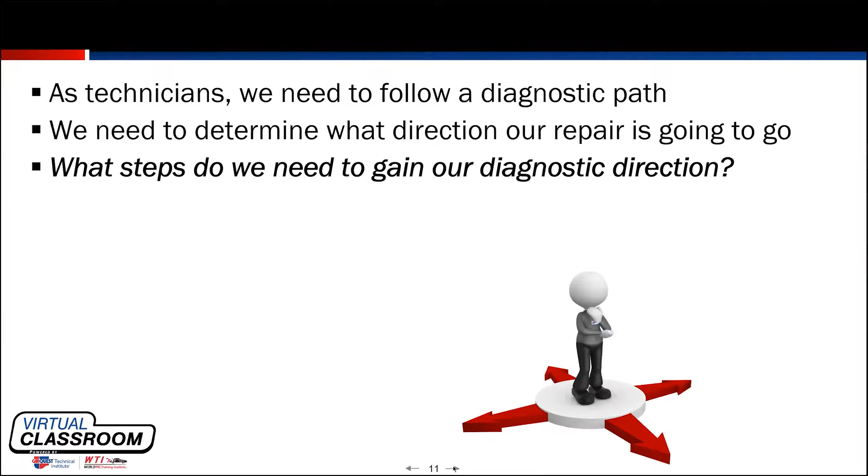So with that being said, when we talk about logic, we're talking about being methodical. We're talking about having a plan. And what goes into the plan is our understanding and our knowledge. How well do we understand what's happening? From that, we want to do one thing. We don't want to do 3 or 4 things. We definitely don't want to do 6 things. We do one thing. We understand what that means to us.

We look at it. So just because we did a test and it says move to step 3, why am I moving to step 3? Why is what I just tested good? And that's the way we want to approach everything we're doing, especially with electrical work, because it's so logical and rule driven. And then we're going to act on what we found.

For those who have heard this talk before, that plan, do, study, and act is a repetitive cycle to keep us from getting lost. I was having a conversation with a friend of mine, and he was saying we should probably do a course just on this with maybe 10 or 12 examples of how we apply it. But we're going to try and implement this throughout the class tonight as we move through some of the conversation.

So one of the things that came up in the previous electrical classes was talking about duty cycle or pulse width, and what impact does that have on an electrical system. I started looking at that, and I'm like, you know, there's a ton of ways to come at that.

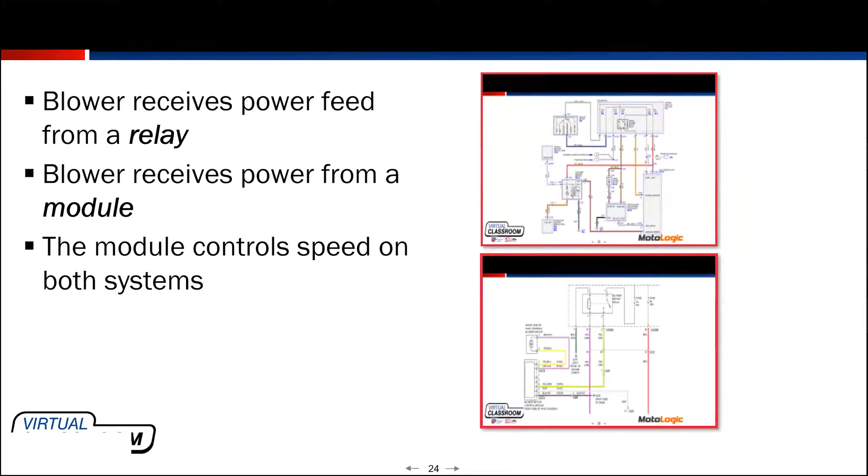It's warm weather in most of the areas that people are tuned in. So I'm going to give you an example of a blower motor control system. If you guys have been on a previous class, we did this one on Monday night. So just bear with us, but I'm going to go through it quickly because I want to put some time into some other systems.

So when we turn on that solenoid, when we turn the power on, the current flows. This is current here. We get the current to ramp up, and then we turn it off, ramp up and turn it off, ramp up and turn it off. And that solenoid is pulsed open and closed. So in this case, this is a pretty slow type of signal.

And what we're really controlling here is both the mechanical valve opening of that purge solenoid, but what we're controlling is the amount of purge vapor flow. Everybody good with that? We're controlling the purge vapor flow.

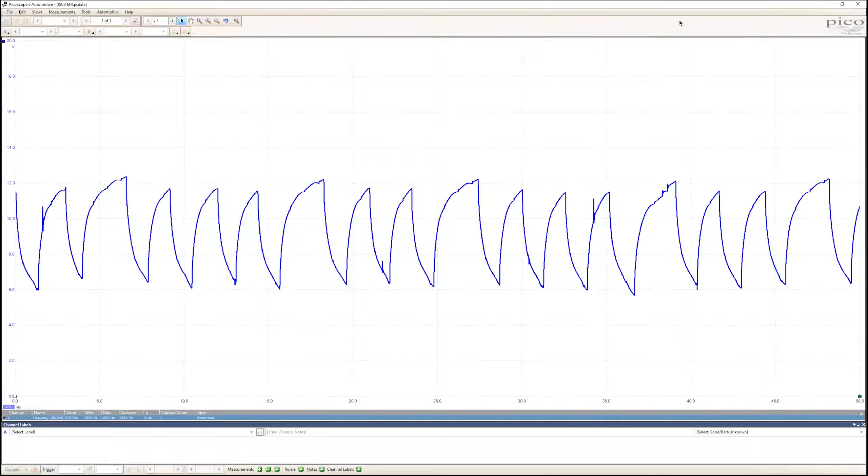And so if we turn on for a 20% duty cycle, then the amount of on time is relatively short. We will get that valve to open, but only briefly, so only a small amount of vapors will flow. If we increase that duty cycle, the purge valve will spend more time open than it was before, and we will get more purge flow.

That same concept can be applied to controlling an electrical device. So if we turn a light bulb on and off really fast, we can control the effective amount of voltage that goes to it.

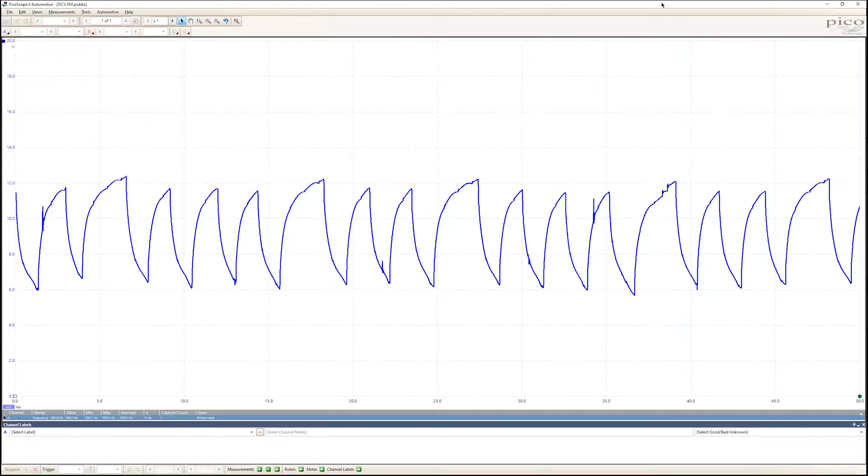Brian, are you there? I thought I heard noise. I'm here, can you hear me? Yep, yeah, absolutely, audio's good. All right, so did you have any headache with the way I just described that? I was not listening, I had to go get my headset. It was on my PlayStation. Okay, let me. It was on your PlayStation. Great, that's a good place for it to be.

How about if we have this conversation? What we're doing here, we're just getting our terminology right.

Now, if I put enough of these on the screen and I have a fixed RPM, I'm holding the engine steady at 800 RPM, and I put enough time on the screen, could I move this and incorporate multiple injector functions that are all at the same pulse width and get a duty cycle reading off of my scope?

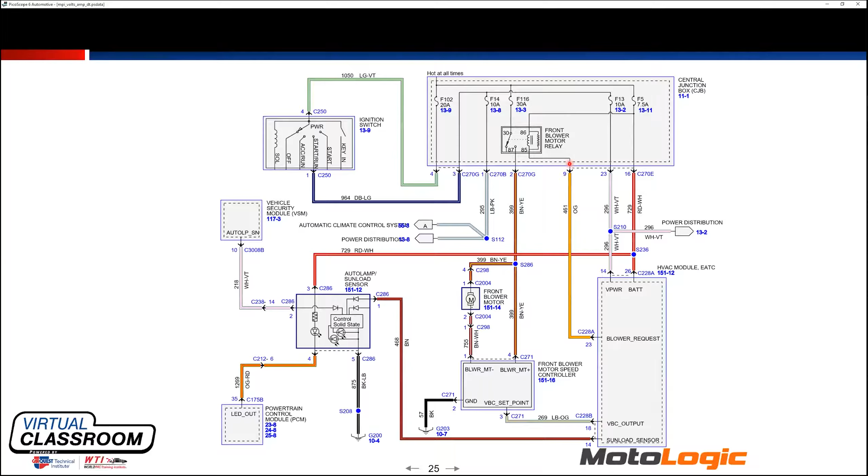And I don't have a problem with it. This is where I think good techs looking at, remember, this is a class on understanding how electricity works. And so when we're trying to understand how a device is controlled, trying to separate them out too far can get people lost. And we're going to get to the reason why as this class goes. So I'm going to say, okay, we've got some slightly different perspectives, but we have a base agreement.

So did you have any problems with what I'm talking about, with how this blower motor is controlled with the on and the off time at the frequency that this device produces, controlling the amount of voltage that's available to the fan, Brian? No, not at all. The duty cycle will change depending on the input coming in. So now we have to figure out, okay, where is the magic in that? And how does the device actually work?

And so here is another diagram. Does this look pretty similar to the last one we gave you? Mm-hmm. Yep. This is actually off of a 2010 Flex, this particular diagram. So we have blower motor relay control. And again, here's those dashed boxes in incomplete views, but these are complete views. So this blower motor speed control, this is a complete view. And I've got a picture of this one coming up. So we have the ability to control the relay.

We have power flowing to the blower motor and the speed control. And then we have, here it's called front blower PWM. And then here you can see in this one, Brian, we've got ground for the HVAC module at the same point as the ground for the blower motor speed control. Everybody good here? Yep.

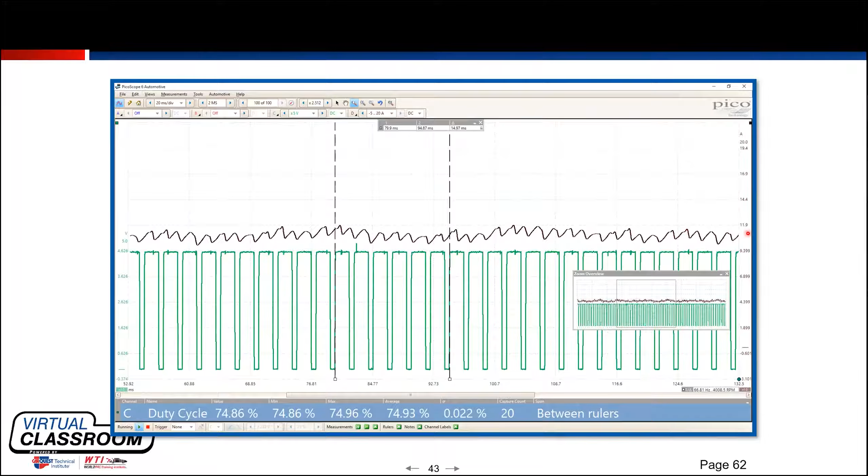So what we're providing as a signal to the speed control is a 5-volt signal here. And that 5-volt signal is being interpreted as how much ground is provided, or how much resistance is put in the ground by the pulse width in the blower control motor. Is that a fair way to put that? Yep. Okay. So then we're going to go one more here.

How would you describe that duty cycle? That is 100%. There ain't none, as we say where I grew up. Yeah. There ain't none. So there we have pretty much a full 5-volt signal to the speed control, and we're seeing a definite repetitive set of commutator events with the current flow.

What is the voltmeter on? What did I have the voltmeter on? This picture was from... Originally, the voltmeter was reading the duty cycle in the previous screens, wasn't it? Or was it just reading average voltage? I might be wrong on that one.

Oh, it's just on voltage. Yeah. Oh, you know what? That was reading average voltage at the ground side of the motor itself. I'd have to go back through my notes. There was a reason I was leaving the voltmeter out of the conversation. I can't remember. No, as a matter of fact, the voltmeter has an amp clamp hooked to it.

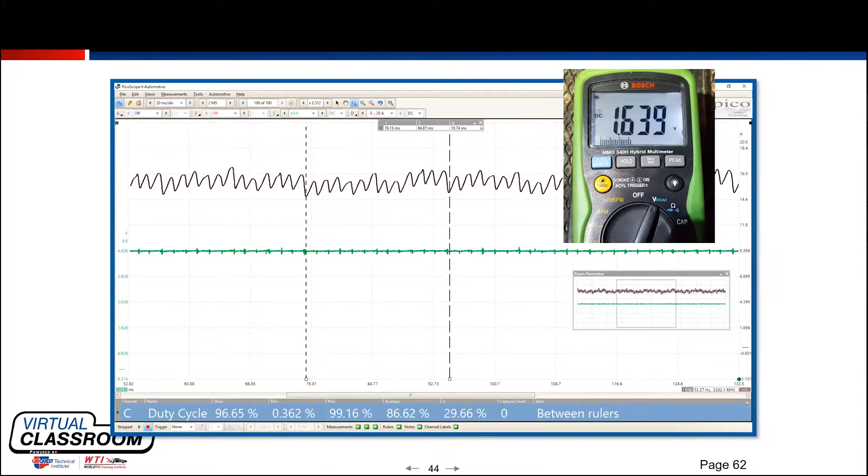So then here's the question that I have for everybody. We're going to go back to this wiring diagram. So what we were looking at with the scope was actually this front blower pulse width modulated input to the blower speed control. If we go to description and operation, it will say that the HVAC module provides a signal to the blower speed control.

So my question is, if this blower motor didn't run at all, could it be a problem with this wire? Sure. That's a missing message. So yes. Why do you say that? If the message isn't there, the controller doesn't know what to do.

Okay, actually, I'm going to show you something. Here's the blower motor speed control. I have supplied it power and ground. There is no HVAC module in play here. If you look at my voltmeter, it's connected to pin number 3. And with this speed control powered up, it's providing 4.73 volts.

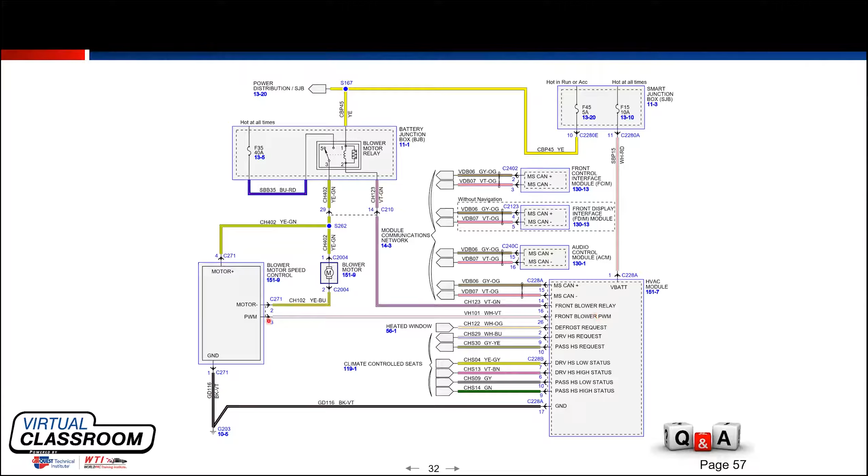And when we looked at the code set, the front blower control circuit, the conditions would be a short to B plus, or a short to ground or open. And that condition 14, if you had that code and the fan was running at all times, the first thing I would check would be that wire between the blower control module and the HVAC module. Does that make sense?

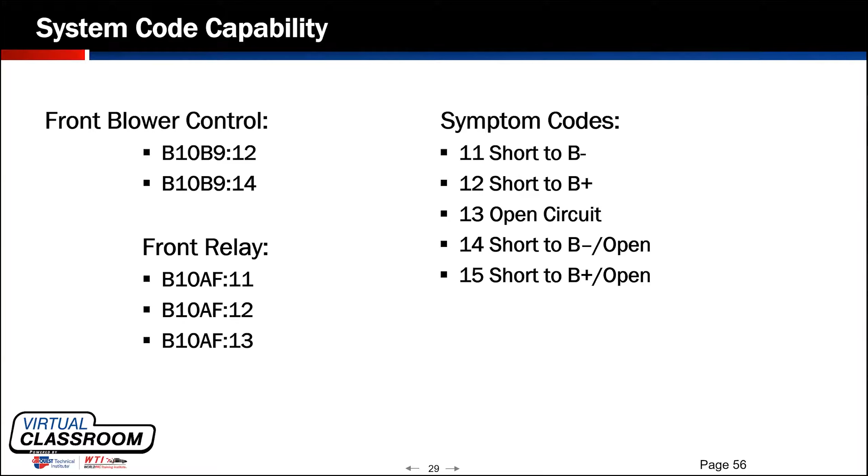Guys in chat, what, Paul? Not based on what you showed us. All right, explain that. I think what Paul caught was that if you go to the full speed signal, not providing a ground would cause the motor to run at full speed. Paul, is that where you were going? Yeah, without the HVAC module pulling it to ground, it's going to assume it's going to run full speed. Yes. Correct. Oh, I must have missed when that conversation actually took place.

All right. So let's look at something that is similar but different, another circuit that looks almost identical, and talk about how it works real quick. Here is a Toyota blower motor. This is most of their new ones. What you're seeing here is the blower motor and the speed controller integrated. If you look at this, that says blower motor, and this is a full solid line, so that's a complete view.

You have a blower motor with 3 wires: hot at all times, ground, and a speed input or signal on the light green wire. And this obviously can't work the same way because there is no relay to cut this thing off. That blower motor always has power and ground.

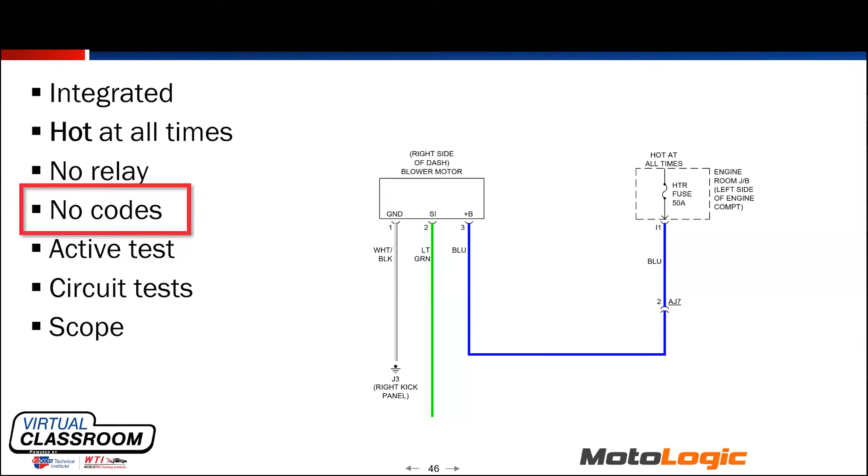Toyota provides no codes for this system. GM blower motors are almost identical, and they provide codes. I'll let you decide which one makes more sense. So, if we have power and we have ground and we do not have a signal here, this motor's not going to run. So here's an example.

Here's a PicoScope file. As a matter of fact, I have these. Let's see. I have a whole bunch of... where'd you go? There it is. Here's the actual PicoScope file.

It's impressive. Huh? It's impressive. Why is it impressive? There's a lot going on. There's a lot going on.

But if you look at this, channel A is fused power. And so you can see that's 12.5 volts there roughly. Channel B is ground. And so we're showing a good ground. Channel C is the speed control. And if you look at that, it looks like amperage. No, it's just voltage. Oh, I'm sorry, I'm on D. Go ahead. Yeah. And D is current. So the brown trace is current. You can see that's pretty much 0.

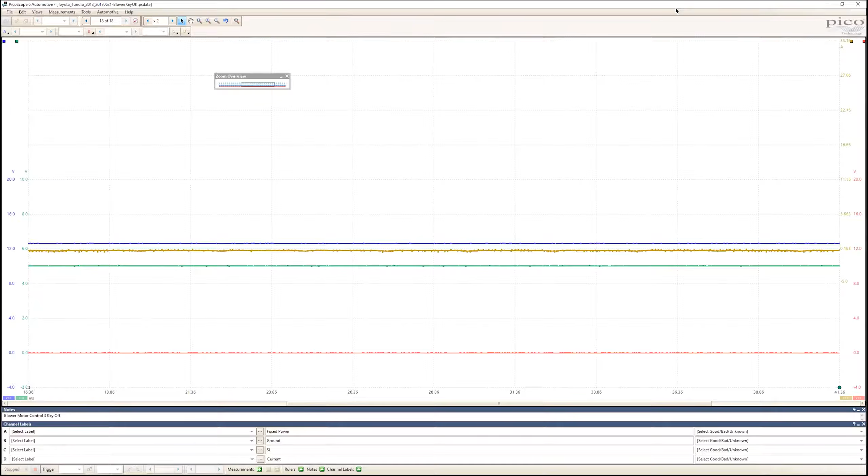So this is actually key off, engine off, right? And I'm hooked up to this setup, and this is proving exactly what we just showed in the wiring diagram. We've got hot at all times. We have voltage being supplied to what Toyota would call the HVAC amplifier, right? The AC amplifier. We have a solid ground, but we have no current flow. And so this one works completely differently.

So if we take a look at what happens with this, this is a picture of the PicoScope file, and I have this one here as well. But if you look at this, here we are, key on, engine on with the blower commanded off. And so the HVAC system is powered up, and there is a frequency of control and a duty cycle that could be measured if I zoomed in on this, but there is no current flow. And what I have done is gone from 0 speed up to speed 31 according to the scan tool, and then back down.

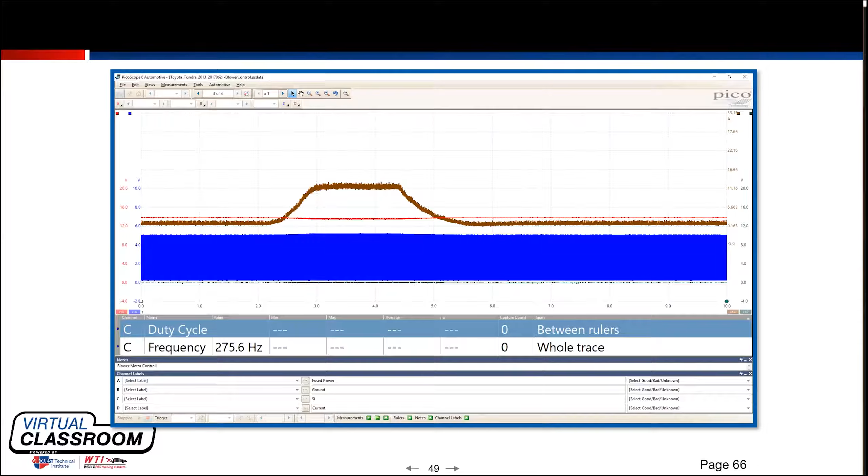And then as we ramp up to full speed, if you look at the window on the PicoScope here, now I'm at full speed. The fan is drawing 11 amps. And this is a brushless motor, by the way, so the current flow is pretty low on this thing. But the duty cycle is only making it to 40%. So with the fan commanded off, it's at 80-some%. With the fan commanded to full speed, it's at 40%. Anything other than that is not a valid signal, so it won't run. Okay, so it's commanded off, it's commanded up to full speed, but it never gets to a 100 or a 0% duty cycle when the HVAC module's on.

Is that a good piece of information to keep in mind? And I say, yes, it is. That rules out the ability to have a short circuit to ground or an open circuit, you know, because that's not a plausible type of scenario that would affect the blower motor. Correct. Absolutely correct. It wouldn't be stuck on high with it, you know, open.

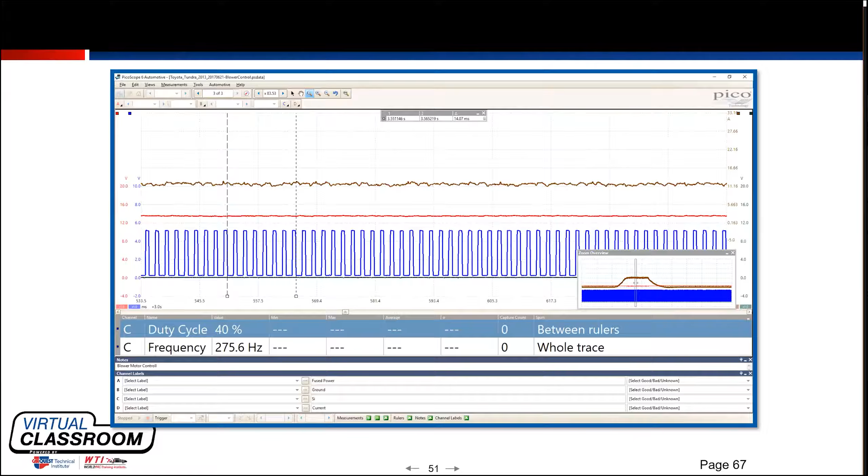All right. I was going to say you have to be careful because Toyota and GM label that green center wire as speed input. So guys want to unplug the blower motor and scope the speed input signal, but when you unplug the blower motor, you just lost your 5 volts and you're not going to see a signal. Correct.

Got to back probe that one. All right. So then we start having to think about more of what's going on. And so this is a huge topic, and we have to realize, what was my quote of the year from Monday night? Electricity and control of systems is a dynamic environment. Randy Briggs, 2020. He's probably been saying it for a lot of years, but there it is.

And so we can get into the laws and the rules, and we can talk about Kirchhoff, and we can talk about Lenz, and then we can talk about Faraday, and we can talk about all kinds of specific laws and rules. But for our purposes, what we need to understand is that it is a definite dynamic environment. And so these are some slides that Randy actually put together, and they have some real valid application, but they're kind of blending the topics all together, and there's nothing wrong with that.

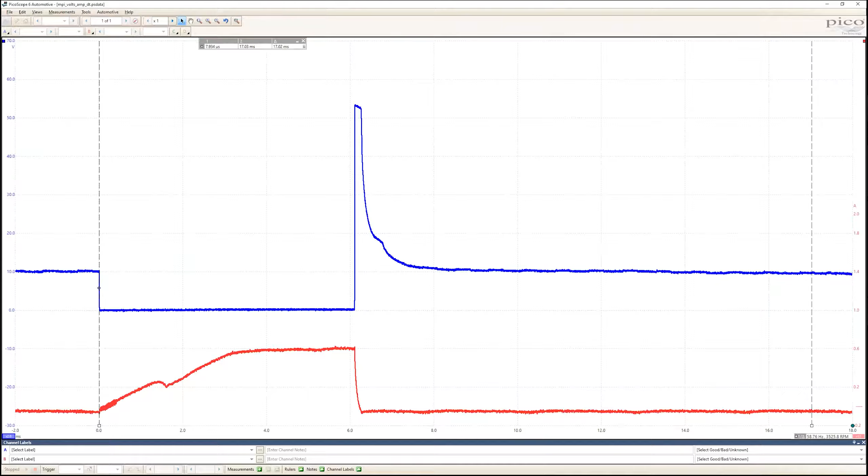And so what does that mean? It means that anything that affects this circuit will affect the mechanical operation. If the windings in the coil have a problem in them, either excessive resistance or not enough resistance, the strength of that magnetic field is impacted. And that basically boils down to the things we need to keep in mind.

What is the characteristic of the inductor or the solenoid that we're dealing with? How many turns of wire are there? What is the size of the conductor? So size and quantity of conductor. And the core type, everybody likes to talk about this, but I kind of push back on it. The purpose of the core type chosen is to concentrate and strengthen the magnetic field.

And that's another key in talking about magnetism and electricity and how much we're actually going to induce. So if I'm trying to build a more compact coil, if I put an appropriate core in it that attracts the magnetic lines of flux that are built by flowing electricity through it, I'm going to create a magnetic field where the flux lines are tighter to the core. And that means I don't need as big a unit to get the job done that I'm trying to do.

If we look at wheel speed sensors, the traditional type of wheel speed sensor, they put a core, a magnetic core inside of the windings. And so there is a magnetic field that is basically sitting there. And that magnetic field has an intensity to it. And with a case of a wheel speed sensor, we actually will take a piece of metal and pass it by that wheel speed sensor.

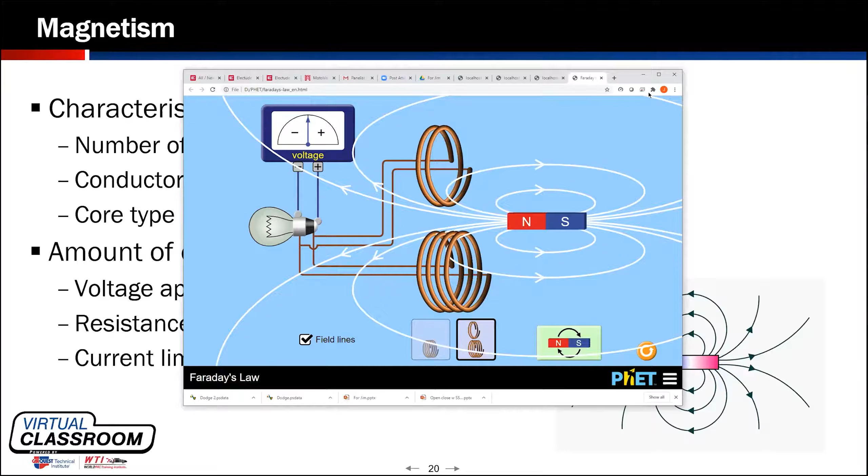Randy, did I do your slides justice? Are you good with how I went through that? Yep, that works for me, Jim. That works for you. Okay, so good.

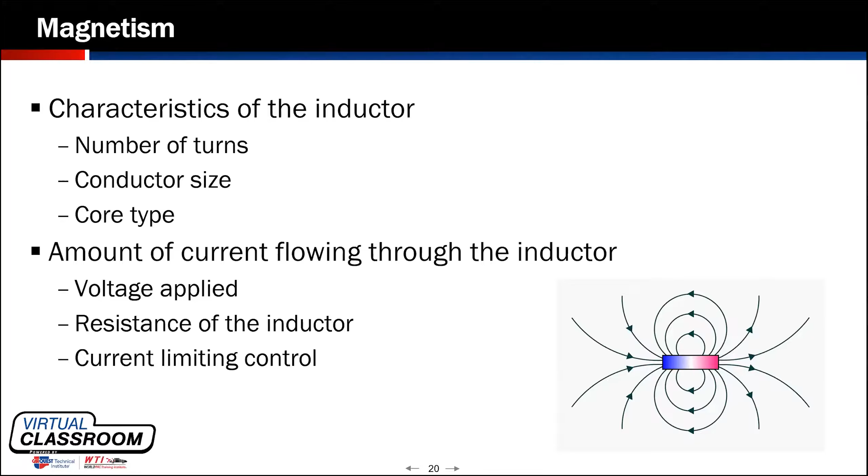So then the question becomes, what do we do with all this stuff? How do we apply it? And let's see. I've got an example of where we use electromagnetism to control a mechanical device. This is just one example. We're going to do another one here in a minute. Variable valve timing. This component right here out on the end is what? A solenoid?

So we have an electrical solenoid, and we have a spool valve, and we have normal timing. We've got the timing moved back, retarded later in the rotation of the engine, and we can advance it. So if you watch, when I go from retarded to normal to advanced, one of the things we have to remember is how this is all working.

So if you think about some of the newer systems, if you've done any research on it, a lot of times, not like this system, this spool valve is actually located in the end of the camshaft. And so it's actually mounted in the center of the camshaft, and the phaser is on the front end of it. There's a real close couple here. But we have an actual actuator that's on the outside. The principle of operation of these things is similar.

So what happens is, by changing the duty cycle to the electric solenoid valve in conjunction with this spool valve and a spring, what we are able to do is, if we increase the duty cycle, we increase the strength of the magnet. That magnet will overcome a spring and cause this valve to move one direction or the other. It's going to depend on where the spring is.

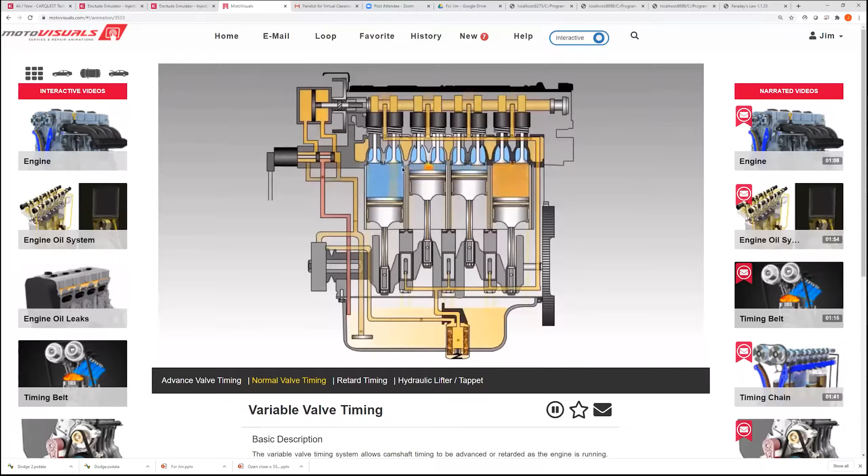And if you look at a lot of the newer cars, you will see pieces of data like, what is the duty cycle when I know I'm moving the cam in X direction? What is the duty cycle when I know I'm moving the cam in Y direction? And what is the duty cycle when I'm holding the valve timing that I currently want? The ability to see that data can give you an idea as to how well that particular system is working. Let me go and bring up another one.

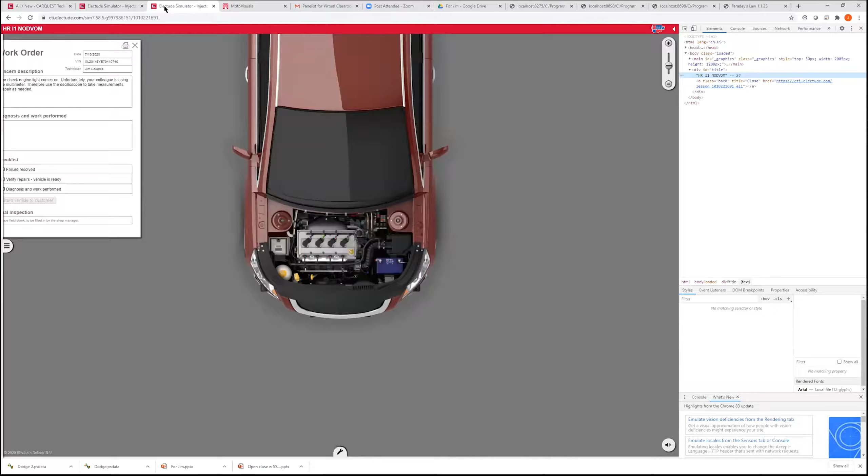Now we get to Diagacar. So for those who don't know, these are the Electude simulators. If you subscribe to our LMS or training or whatever, you have access to a lot of this stuff for online training. There's quite a few different simulation scenarios.

Some of them are similar faults, but they make you approach the diagnosis in different ways based on what tools they provide you. So we have here, and I know this work order will be hard to read for a lot of you, so I'm going to read it to you. It says the check engine light comes on, the vehicle runs poorly, diagnose and repair as needed without the use of a scan tool. So they've taken our scan tool away.

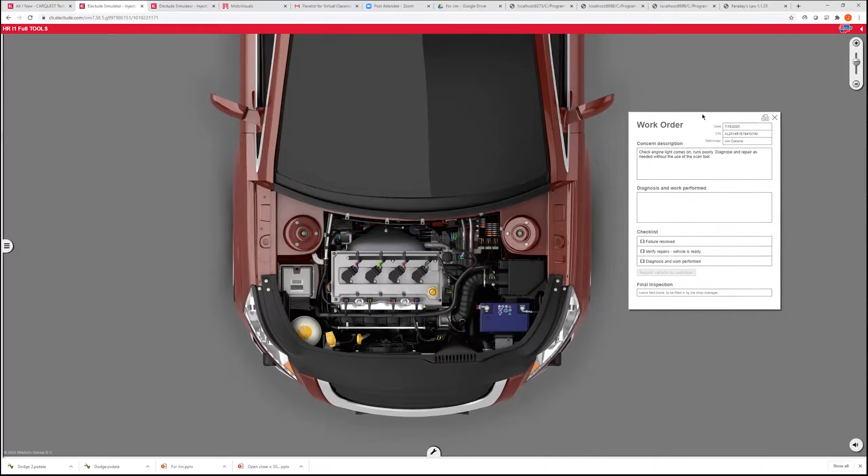I don't know if I like that one at all, but we have it, so we're going to ignore some of that. How about that? I'm logged in under my account, so I'm probably getting really bad test scores for failure to follow directions, but that's okay, we're having a learning environment here. Scope all the things. All right, Paul. Paul, do I need to turn your microphone on? You ready to come in and play on this one?

Say yes or no. I'm not trying to put you on the spot, but I'm putting you on the spot. You want to chat? Sure, I like it.

Paul, let me find you here. There. Can you hear me? Absolutely, absolutely. Hey, Paul. Hello.

So Paul, there's no right or wrong way. You may choose some options, but I'm now going to become a servo, which means you have voice control of this servo. Have you seen these simulations before? Yeah, you have. Okay.

So for those who don't know, I have an instrument panel. I have the ability to start the car. I can control the noise level there. Can you guys hear that? Yep, okay. I'll shut that off for right now. We have wiring diagrams, we have breakout boxes, we have an oscilloscope, we have a multimeter. No, Brian, I don't have an amp clamp, just in case you were going to ask.

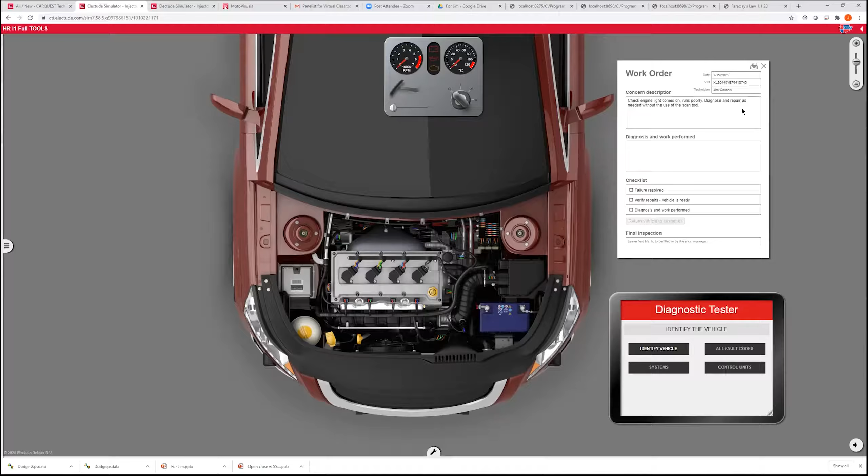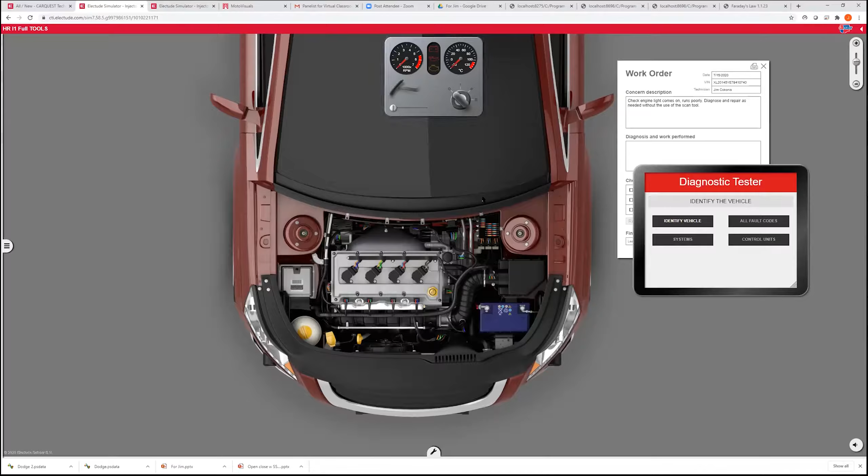Question for you, Paul: if it says the check engine light comes on, it runs poorly, diagnose and repair as needed, what would be your approach to this? What would be the logical thing? How would you go after this? What's your plan? Well, does it have like a clear flood mode? Can you try and see if there's a mechanical issue first? Or no, it started and ran just then. So, but to see if there was a dead hole?

Oh, he's saying relative compression. Yeah, like a relative compression, see if we had a mechanical problem. Okay, I don't have that on this simulator, no. All right, if that's good and I don't have a code, let's say it's good. Yeah, all right, if that's good and I don't have a code, I might unplug something just to see which one doesn't react, just so I get a baseline, like if it's one cylinder.

Let me ask you a question. If the work order says the check engine light comes on and it runs poorly, wouldn't you go after a code just to see if it was one? It said don't use the scan tool. Oh, I broke those rules. I said, that's all right. Oh, we're going to use everything we've got here because they gave us one.

Yeah, this is real. Well, yeah, then I would check the code. This is real world, okay. I don't want to cramp your style. It's real world here. So yeah.

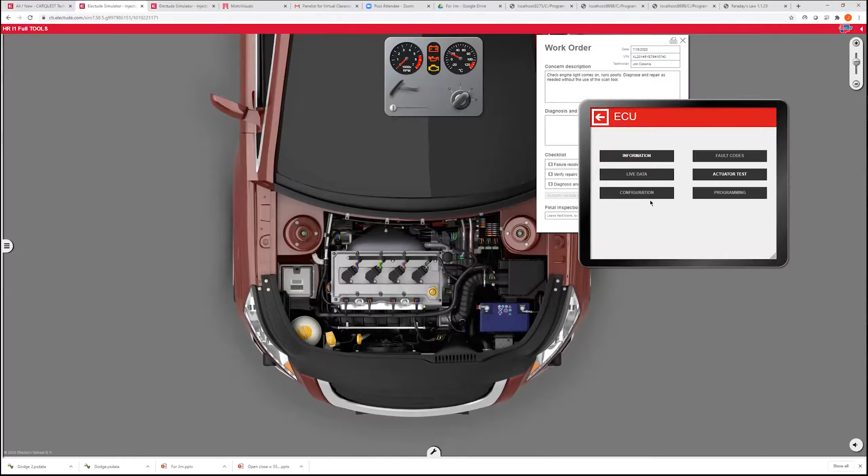I'm going to turn the key. Turning a key with a mouse is a little harder. I'm going to turn the key on, I'm going to identify the vehicle here. And oh look, it's not going to let me pull codes. Okay.

Your scan tool is not up to date, Paul. We can't communicate with this vehicle. Back up and punt. What do you want to try now?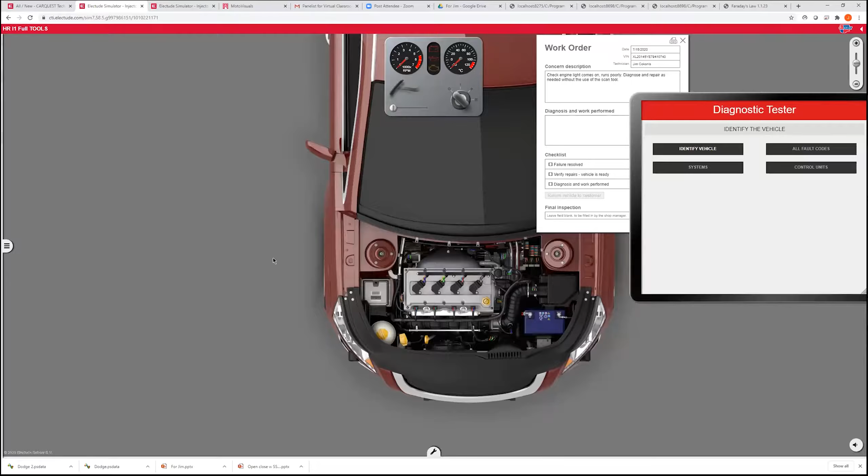I'd try and see if I can find out which cylinder it is. Either that, or if there was a common fuse that controlled everything, I might hook an amp clamp up to it. Okay, like so I'm going to pull injectors or coils or something like that. Okay, try and do the simple stuff first, see if you could pinpoint what cylinder it is.

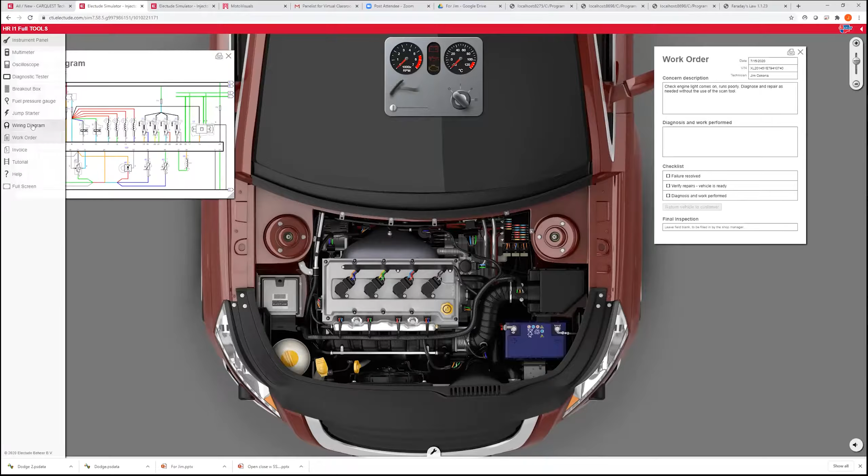Oops, I drug the car instead of the corner of the wiring diagram. I'm strong, I didn't know I could move the car that easy. All right.

So here's your wiring diagram. You've seen this before? Yeah. It looks like what? Here's our fuse and our relay that controls our 4 injectors, our EGR valve, our canister purge solenoid, and our throttle control module, all get power from this fuse.

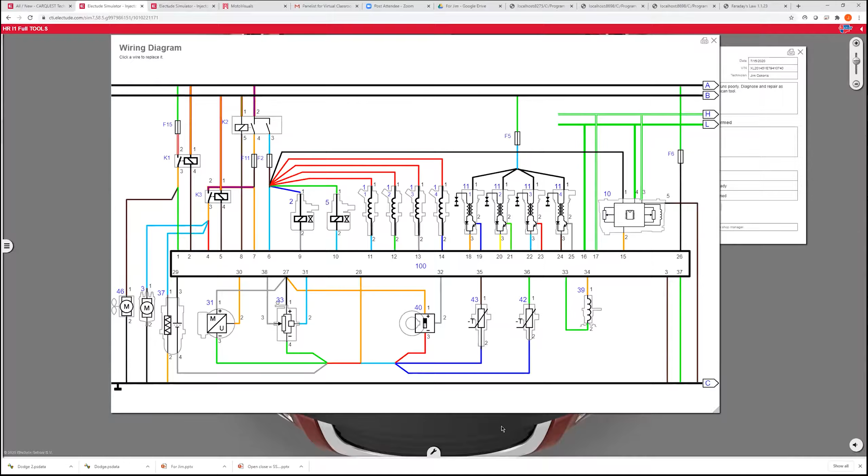When I had the thing started and running, did it sound like it was a pretty steady miss to you? I couldn't tell with the phone speaker I got. Did that help at all? I don't know, it just sounds like white noise to me. I'm sorry. Okay, do you see the engine shaking? No, he's on his phone.

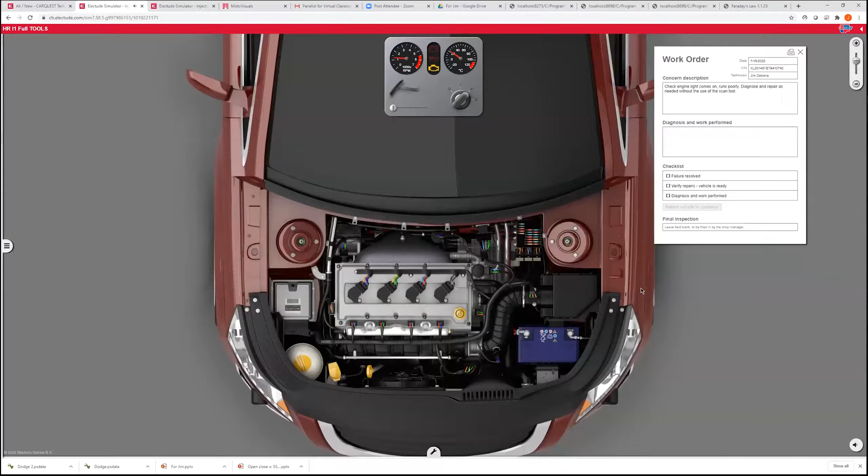It might be tough. Oh no, okay, so you're really in tight here. Hard to do, is it shaking? Yeah, it's shaking a little bit, and it sounds like it's got a bit of a miss. Yeah, all right, Jack says, I hear a skip. I agree. Then yeah, I would try and pinpoint which cylinder the easiest way I could.

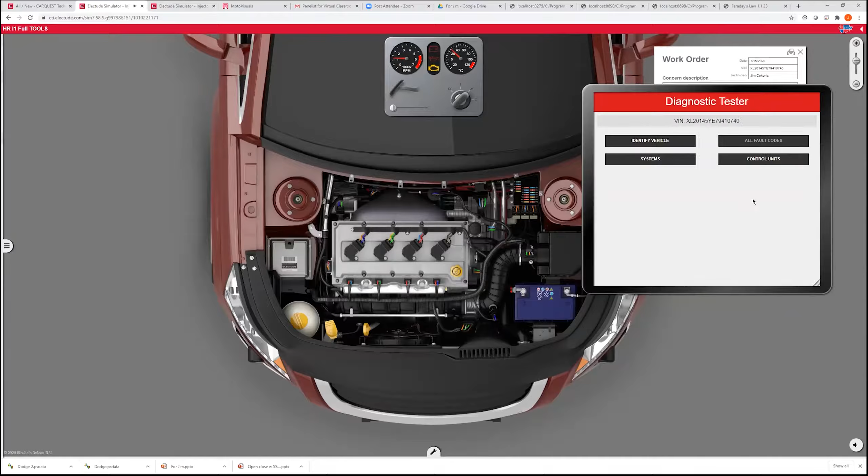Not letting you. Well, wait a minute, that's weird. Can we? That's only 20%.

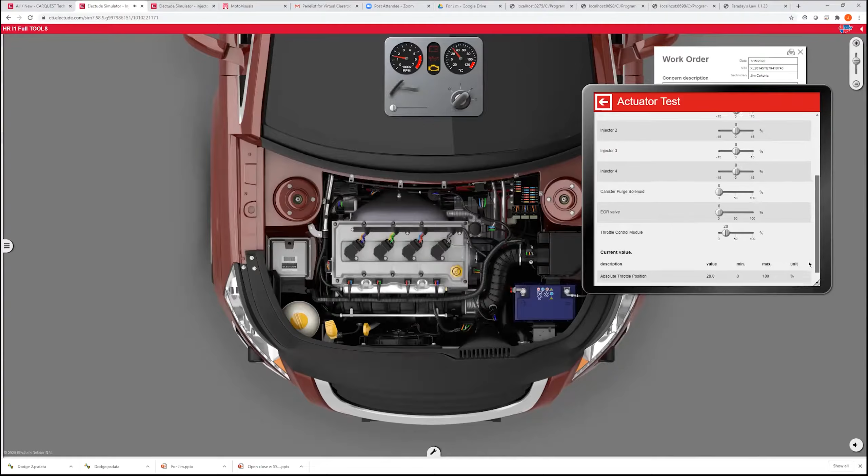Yeah, it's not giving me the ability to cancel an injector. Bummer. Can you just unplug the injector? We can. I know some guys will have heartburn with that, but let's do that. Anthony jumped in to give you a hand here, if you don't mind. So, pick an injector, Anthony.

I'd start with 1. Oh, okay. Number 1. Did I just win? Play the lotto. We don't know why yet.

No. Let's unplug 2. Ooh, that got worse. That got worse. I did 2 and 3 and 4. Okay. So all we know is that the cylinder that's not contributing very well right now is cylinder number 1.

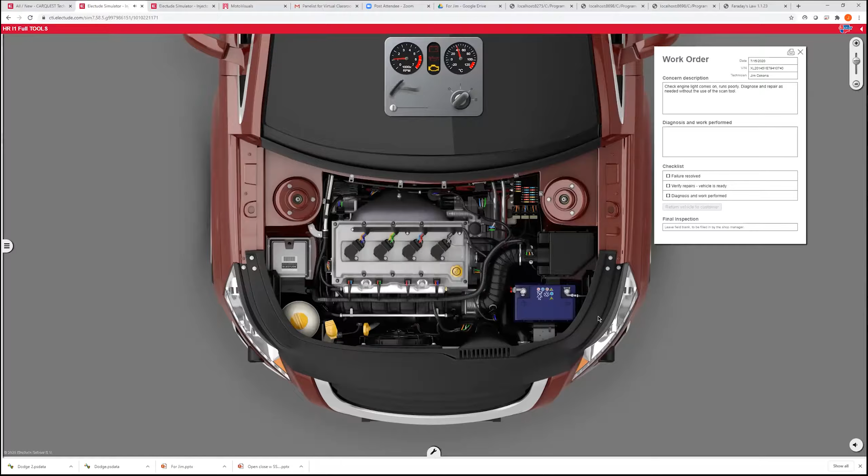So now what? Well, let's make our new plan. Our scan tool's useless. Somebody ran over it. What other tools do we have available to us, and how can we approach this? Could it be ignition? Could be. Since we don't have a scan tool, this could be an ignition problem that's been detected. We have a check engine light on, but we can't get a code. This could be an ignition problem that's been detected, and it's turned off injector number 1. Would you guys agree with that? Yep.

Yeah. So how would we figure out if injector 1 or the ignition is even working? Voltage. Check voltage to see if it's getting power and ground. Just swap it. Brian, we can swap it, I'm kidding, but I hear you. Swapping a fuel injector, I got a heartache with because of all the O-rings and all that disturbance. But we can do it.

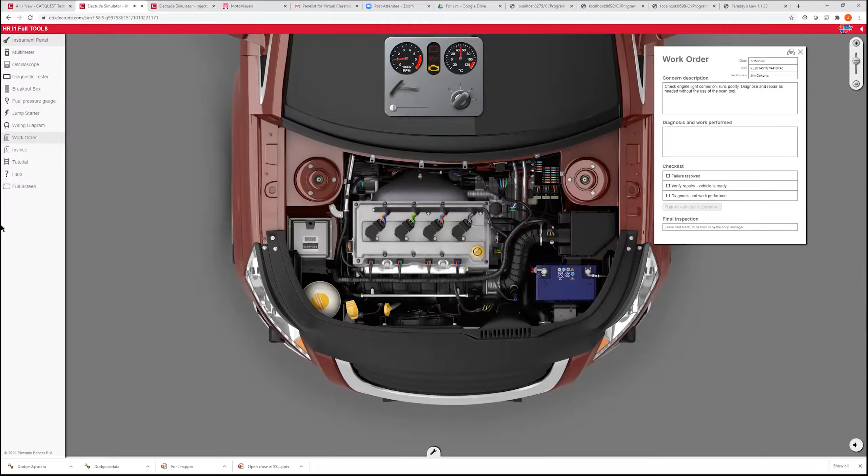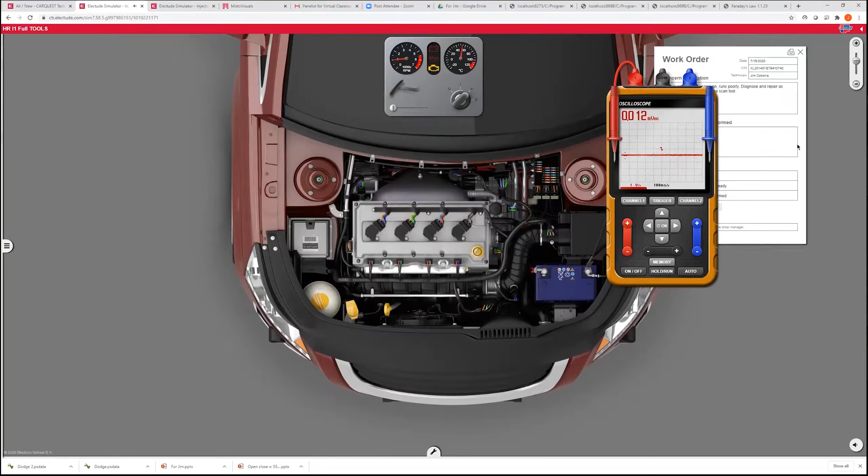We got one of these things, which Paul, if you're on a phone, I've got an oscilloscope up here. So I just hooked the oscilloscope up to ground. What do you think? Should we look at maybe the injector control? Yeah. Okay. So what wire would you hook up to? The non-red one. I like it because red comes off the fuse. Those are the powers to all of them.

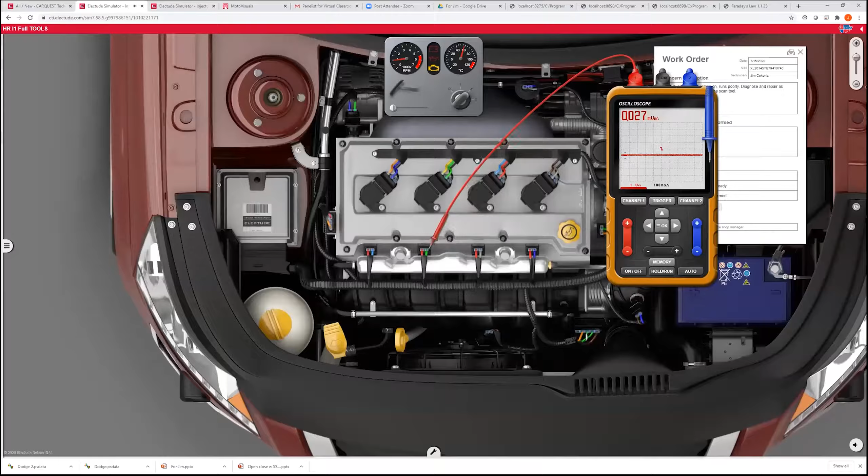How many of you guys like to test a known good first? Sure. I do. Known good. All right. So I'm going to go to 2. Oh my goodness, my mousing skills tonight. There we go. Can you see that pattern, guys? Yep. Okay, so if I'm at 20 volts a division, that looks like vehicle power. That looks pretty good. It's saying I've got 13 volts. And it looks like I'm pulling this one to ground pretty well, yes?

Mm-hmm. And what is this thing here? The inductive kick. And where does that inductive kick come from? Collapsing magnetic field. So we turned on that injector, we built a magnetic field, and when we turned it off, the magnetic field collapses across that injector. That's a magnetic field moving quickly across that wire, and that produces that voltage. And we're getting, what, 60 volts off of that? Would you agree? Yeah, 20 volts a division, 20, 40, 60. That's about right.

Let's go look at our other one. All right, so you got no inductive kick. Okay. So now the question becomes, what is wrong? Probably a weak magnetic field, open coil windings inside the injector. Can it be an open coil winding with the voltage pattern that we have? Oh, no, because it's getting battery power, so it would be a weak, high resistance. Okay.

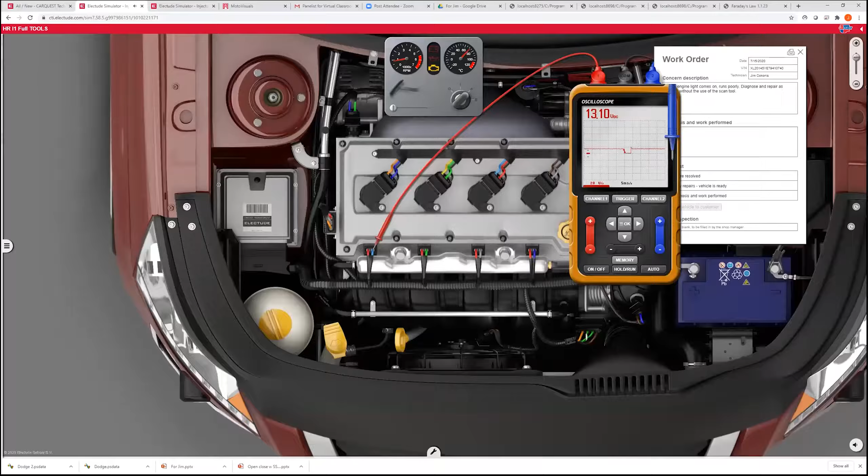So I'm getting some highs. Sean, yours would produce a low resistance, wouldn't it? Because we've shortened the wire, so there's going to be less resistance, right? Yeah, okay. So let's try and figure that out. Let's shut this off. We don't have an amp clamp, unfortunately, but we do have a multimeter.

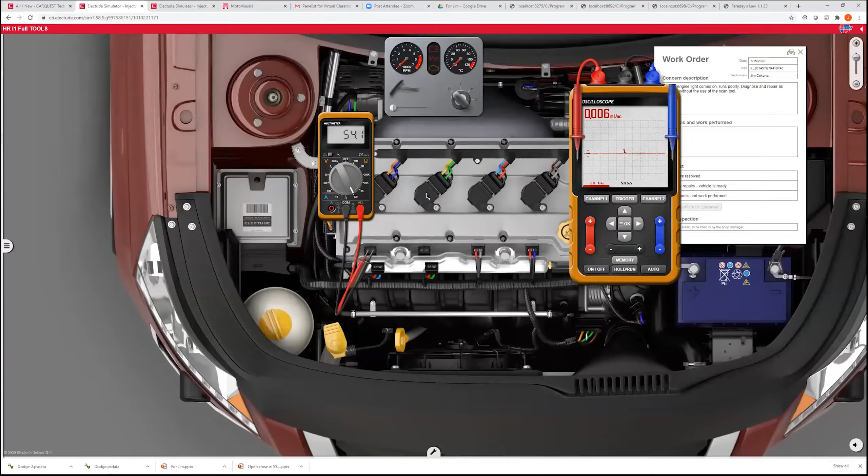Oh, I'm going to have a conversation with whoever wrote this one. Could be. Hey, Jim, let me chime in here for a second.

Yeah. I'm looking at the answers here, and we have coil-to-coil short, we have high resistance, and I'm thinking back to those laws that Rich hates so much. When we talk about building a magnetic field, what were those factors again? The amount of current. So the amount of current is determined by voltage, which we've got, right? And it's determined by the resistance of the inductor. And this looks like we've got high resistance. So in that case, Anthony's right.

But wait a minute, there's something else. Another factor is the number of turns in that inductor. And if we have a coil-to-coil short, we effectively have fewer turns. So Sean's right.

Randy, you're not supposed to pull back the curtain. Remember, pay no attention to the man behind the curtain.

The conversation was designed to, I wanted to take a bet, so I took a bet, and I wanted to get everybody else to chime in on the bet because it got everybody thinking. And so if you gave your answer for the right reason, as Randy just jumped in and let the cat out of the bag, fantastic, because that's exactly the type of logic we were looking for.

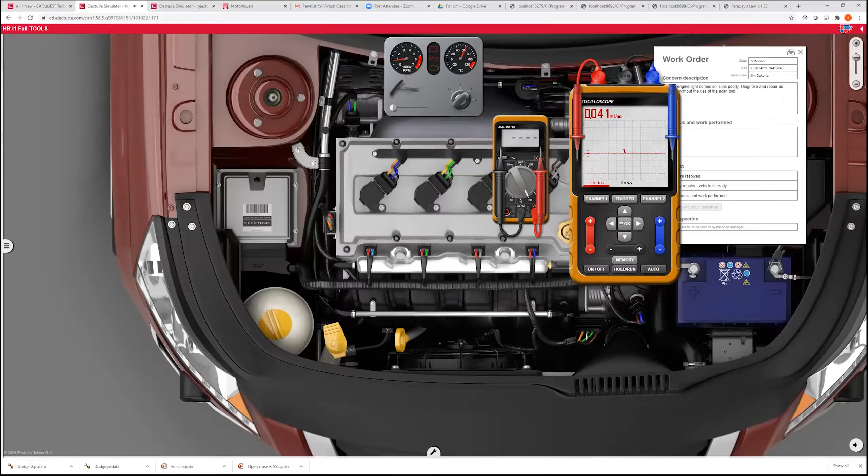Hey, Jim. Yeah, what? Can I jump in here for 1 second? Yeah, just don't hurt yourself. I'll be real quick. Bring the wiring diagram back up, please.

Okay. So a couple of people said amp clamps. They would use their amp clamp on fuse F5 or fuse F2. If we were to pull those fuses out, put a loop of wire, an amp loop in there, and put our amp clamp on it, we could see all of the injectors or all of the coils, depending on which fuse we were on. And it was a question that came up Monday. Let me see if I can share a screen here for 1 second.

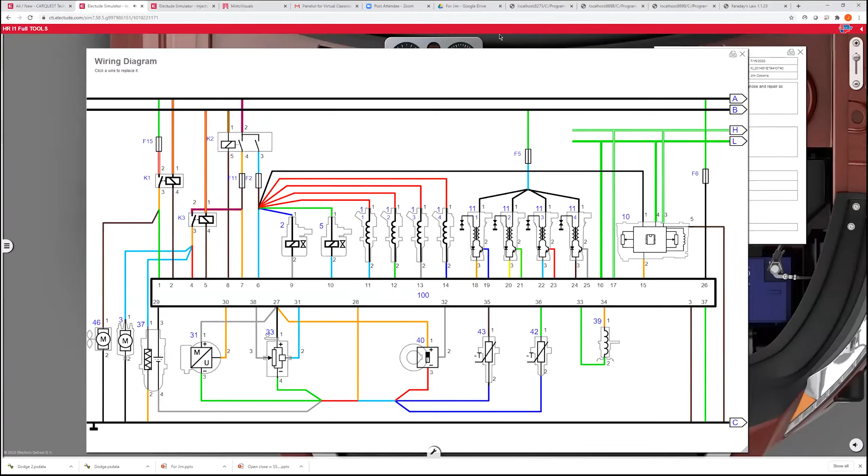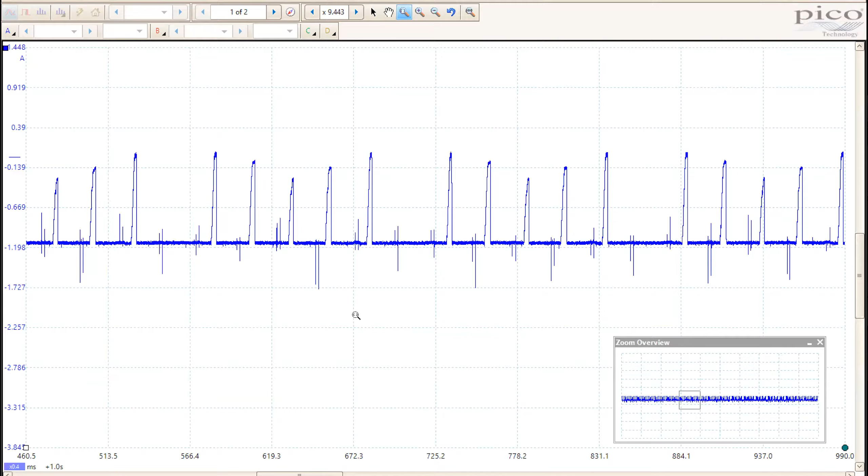If we did that on that car, we would see that. Can I ask a question since you have this up? Sure. Is there another channel that you have open right now? Oh, I think somebody's familiar. Paul, are you chuckling? Was that you chuckling? Well, it's my waveform.

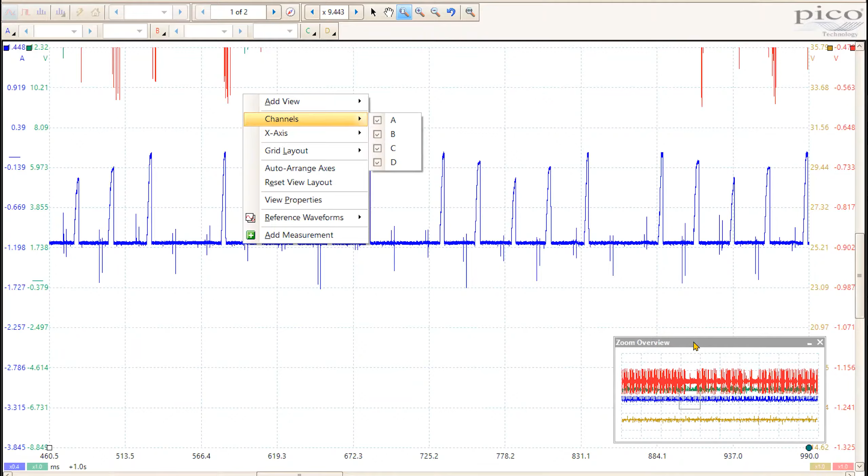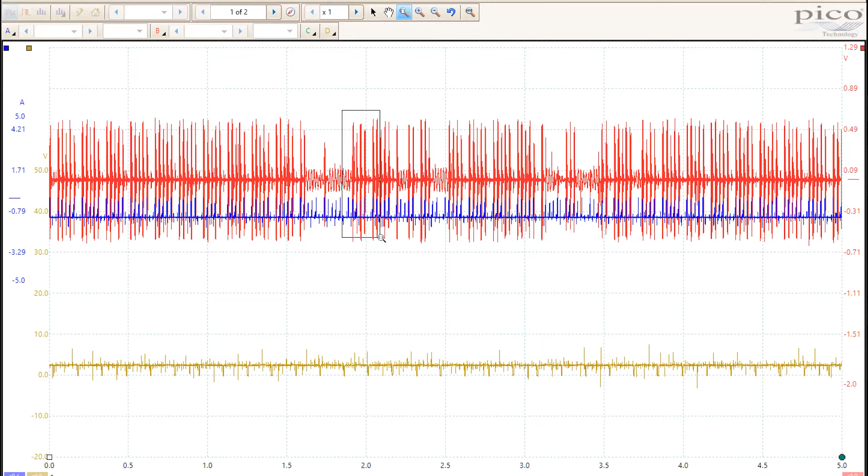Nice. All right, just let me get it. Randy, I'm going to ask for forgiveness later. We're going to do a quick teaser on something that's coming in the not too distant future. Zoom in and put these. I'm going there. Let me get. So actually, yeah, that section right there.

And Paul, without giving away the farm, is there a little bit of an art to this technique? You got to kind of get used to using it. And yeah, definitely. I'm no expert at it, but Rich helped me figure it out. Okay. So I just thought that was a beautiful pattern. This was awesome, and we're going to share more about this later. But here's an interesting thing that I see.

I don't even have to know exactly what's going on, but I can tell you that what you're looking at here, and we're going to do an entire class on this because Rich and I have been playing with this for over a year. These are your current ramps from your injectors and a missing event because we have either a bad driver or a bad injector. I don't know what the diagnosis was yet. Looked like it was an open injector, probably.

What the red traces are is an ultrasonic microphone probably touching the fuel rail. Yeah. Okay. And you can see the difference in the intensity of sound from each injector. And I'm going to say that the one there at the 87.46 time base, if you see, it has a lower current flow, which means it probably didn't build as strong a magnetic field. It also didn't make as much noise as the other injectors. And the one that's missing basically was a whimper or nothing or just ancillary noise.

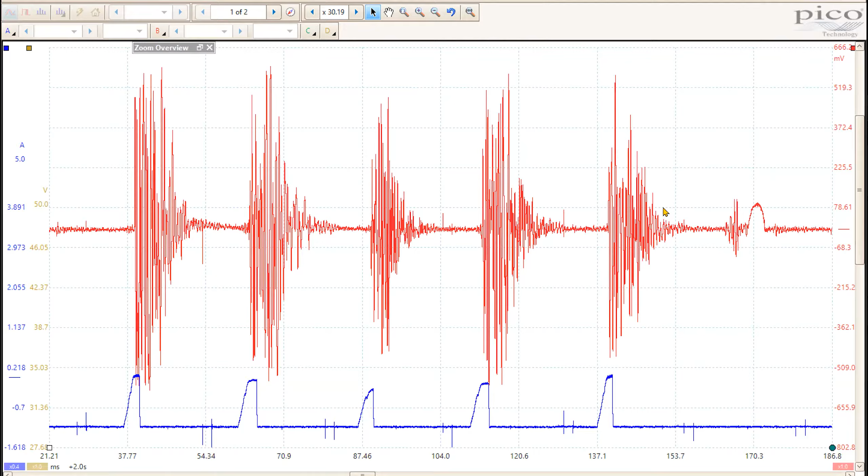So there's lots of different ways to come at things, and we're going to talk about that one later. Put it away. We're not going to get distracted by that. Randy, I know we're getting late here, and if people have questions, we're definitely going to go after any questions that people have. But you had a really slick slide stack on doing something exactly like Paul just described with transmission control solenoids. Oh yeah, we can do that. No problem. You want to close out with that one, and then we'll see if there's any questions.

And hopefully we've started to delve into the topic of magnetism and mechanical control and diagnostic strategies using that type of stuff. And while Randy's bringing this up, Robert brings up a really good point. Can't you also see the pintle closing on the voltage screen? Yes, because again, piece of metal moving, closing, disrupts that magnetic field, and in the inductive kick, you can see the pintle closing.

Awesome. Okay, I have to apologize. My Zoom crashed there for just a minute. So anyway, here we are. Just a quick show of hands. How many guys out there are tranny guys? Transmission repair? Okay. Transmission repairman. Yes, thank you. Okay, we got one or two. Early in my career, I was given the opportunity to become the shop transmission guy. That was about the same time the 700R4 came out. I hated that. Good money. So I hate transmission fluid running into my armpit. That's all I'm going to say about that.

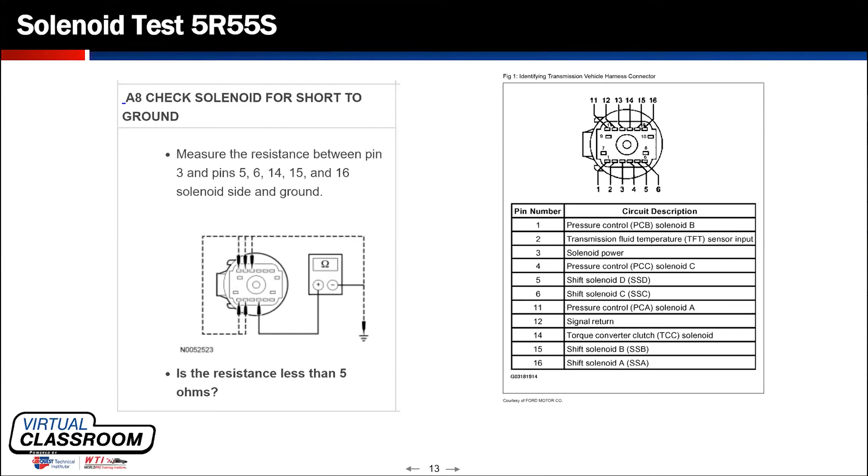One of the things that really stands out to me, always has, with Faraday's law, is Faraday's law says that if you have a good inductor, no matter what that inductor is, it should resist a rise in current when we apply voltage and ground to the circuit. Did we resist a rise in current in this case? Absolutely. Absolutely we did, because we did not go straight up. So we know we have a good inductor. We know the resistance is about right because of our peak current.

And we need to know one other thing, and that is this. This is that pintle hump. Now, there was a little bit of confusion as to why that pintle hump happened in Monday's class. So I want to clarify exactly why that little deviation happens.

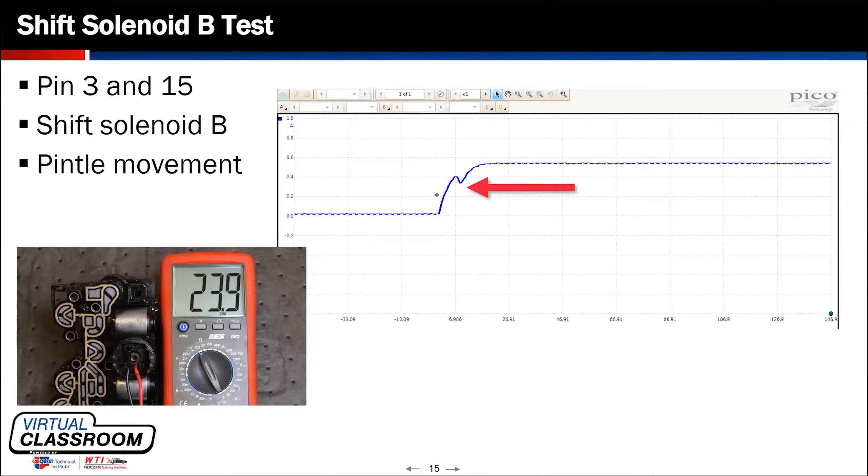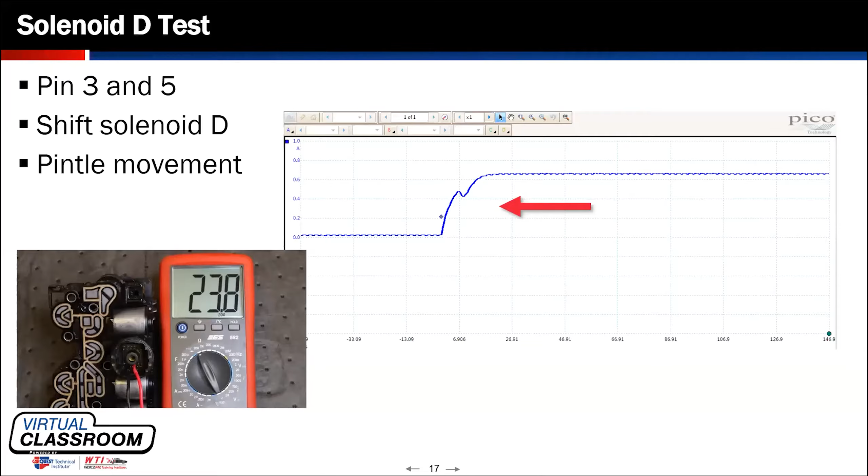Well, let's take a look at, let me switch here quick. There's solenoid B, same thing. Everybody good with that? Looks good. Resistance is about right, correlates with the current that we're measuring. There's shift solenoid C, about the same thing. Everybody's happy, right? Mm-hmm. Okay. Here's solenoid D. And finally, here's the 1-2 shift solenoid.

So think about this for a minute. We would have done a resistance test on this solenoid bank and everybody would be stellar except one, and it's pretty close. Okay. What we did not know, or what we could not know doing a resistance test, is whether or not that solenoid actually moved. And forget about hearing it click inside the transmission. That ain't happening on this one.

So anyway, if we really truly understand the characteristics of an inductor and how it should react to the application of voltage to that circuit, and how current should rise, and how the magnetic field can deviate and make that current rise change, we can start to really understand what that picture is telling us.

Now, I'm sure a lot of you guys out there have done this kind of thing and tried to recognize pintle humps for years. But keep in mind, this is not just for injectors. This is not just for shift solenoids. This is for anything that has any kind of a metallic core and will move within that device, and gives us a wealth of information. One hookup, a few button pushes on the scan tool, and you're done. And my favorite part, no transmission fluid down your armpit.

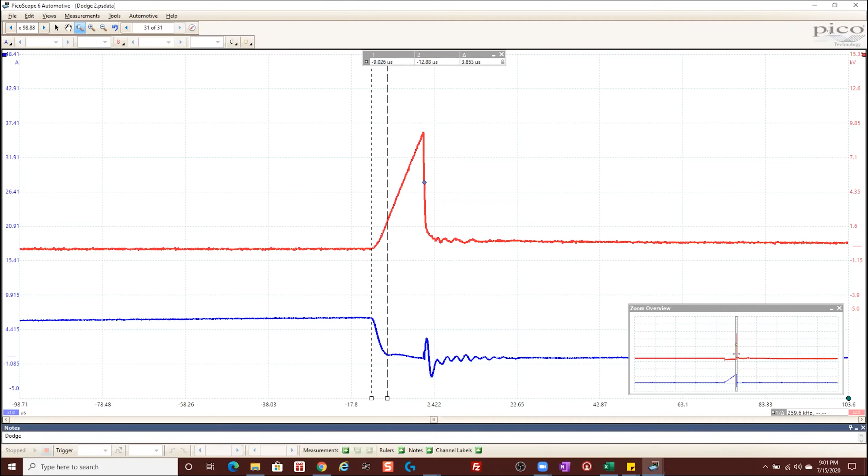So, if you guys get a Ford, like an Escape in, there's a TSB for, you know, if you have a failed coil, replace all coils, all plugs, and the PCM. Well, before you go doing all of that as a proper repair, grab your scope and take a look. You'll see just how bad those drivers can be damaged. Even cylinders that are probably firing fine.

So do we want to answer Ezra's question there before we sign off? Oh, let's see. Can a stethoscope rod with a First Look delta pressure sensor possibly produce the same or similar ultrasonic waveform? I saw something similar by Trained by Techs. I can actually answer that one. Can you? Because I've done it. The ultrasonic microphone is much more sensitive.

We have a Trained by Techs video where we use the stethoscope rod and the First Look style sensor. Hans Jorgensen does it to pick up some noises on a belt or accessory drive, and it works great for that. But it's not accurate enough or sensitive enough for picking everything up. That's something we'll address in future classes. It's a good idea. It's cool. It works great. But using the First Look sensor, it just isn't as sensitive as that ultrasonic microphone. Yeah. And it is not a stethoscope. True. Not a stethoscope. Yep. That's for a future class.

Can you tell this topic is dear to Jim's heart? So he's busting at the gate to show you guys. So we'll do that. All right, Randy, you got to remember, I've been playing with that stuff since the turn of the century. That was 1999 to 2000. I got the first unit.